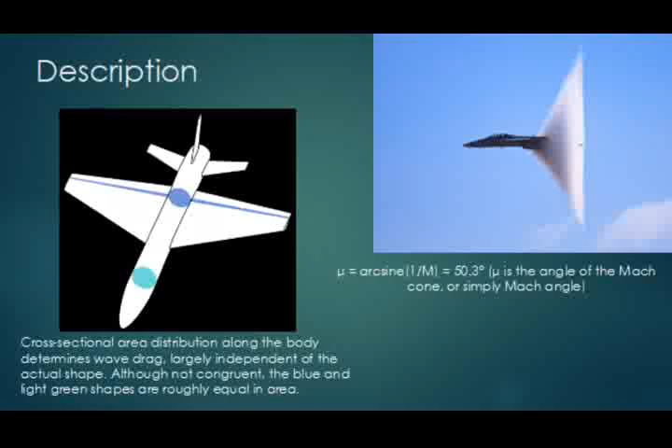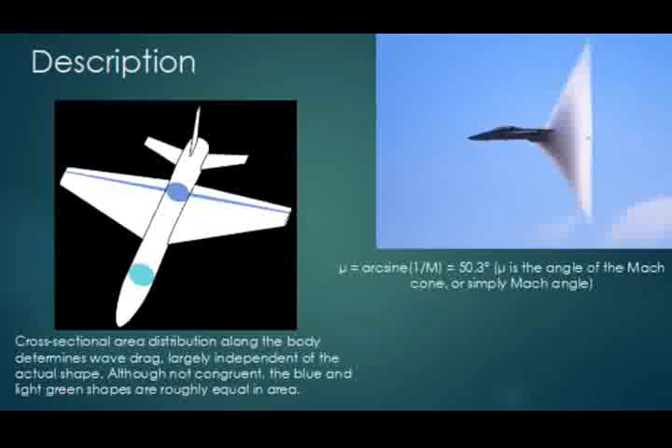To reduce the number and power of these shock waves, an aerodynamic shape should change in cross-sectional area as smoothly as possible. The area rule says that two airplanes with the same longitudinal cross-sectional area distribution have the same wave drag, independent of how the area is distributed laterally, for example in the fuselage or in the wing. Furthermore, to avoid the formation of strong shock waves, this total area distribution must be smooth.

As a result, the aircraft have to be carefully arranged so at the location of the wing the fuselage is narrowed or waisted so that the total area does not change much. Similarly, but less pronounced, fuselage waisting is used at the location of a bubble canopy and perhaps the tail surfaces.

The area rule also holds true at speeds exceeding the speed of sound, but in this case the body arrangement is in respect to the Mach line for the design speed. For example, consider that at Mach 1.3, the angle of the Mach cone formed off the body of the aircraft will be about mu equals arcsine times 1 divided by m, which is equal to 50.3 degrees. The mu being the angle of the Mach cone, or simply the Mach angle.

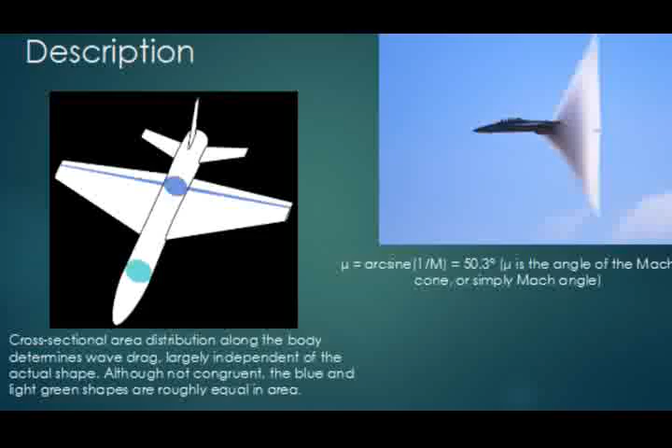In this case, the perfect shape is biased rearward or aft-facing. Therefore, aircraft designed for high-speed cruise usually have wings towards the rear. A classic example of such design is the Concorde.

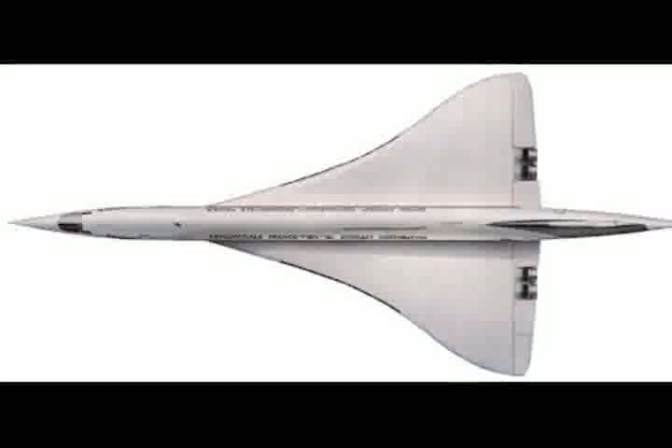When applying the transonic area rule, the condition that the plane defining the cross-section meets the longitudinal axis at the Mach angle mu no longer prescribes a unique plane for mu other than the 90 degrees given by the m equals 1 part of the equation given earlier. The correct procedure is to average over all possible orientations of the intersecting plane.

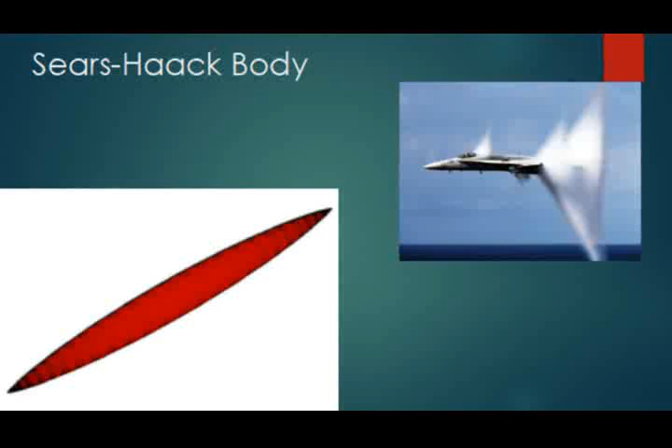Now to discuss a relevant topic, the Sears-Haack body, which is a superficially related concept, but it is the shape with the minimum wave drag for a given length and volume. However, the Sears-Haack body shape is derived starting with the Prandtl-Glauert equation, which governs small disturbance supersonic flows. But this equation is not valid for transonic flows where the area rule applies. So although the Sears-Haack body shape, being smooth, will have favorable wave drag properties according to the area rule, it is not theoretically optimum.

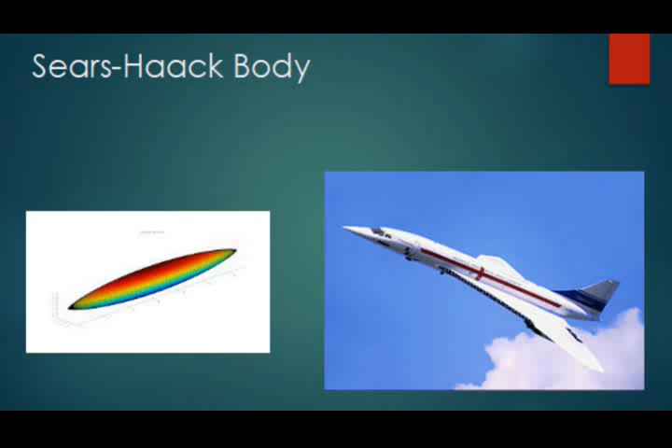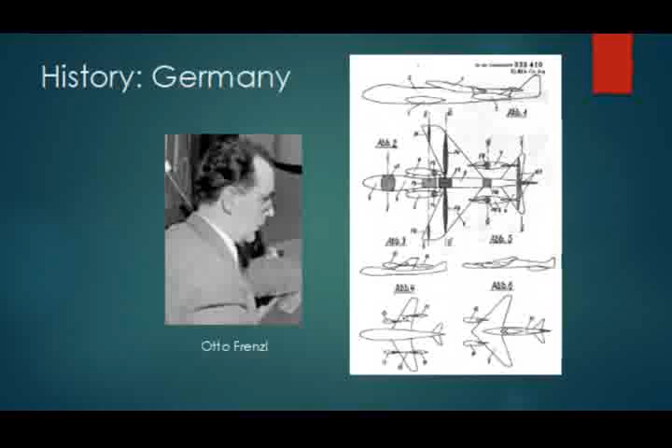A bit of history on the subject, starting with Germany. The area rule was discovered by Otto Frenzl when comparing a swept wing with a W wing with extreme high wave drag, while working on a transonic wind tunnel at Junkers Works in Germany between 1943 and 1945. He wrote a description on 17 December 1943 with the title Arrangement of Displacement Bodies in High-Speed Flight.

This was used in a patent filed in 1944. The results of this research were presented to a wide circle in March 1944 by Theodor Zobel at the German Academy of Aeronautics Research, in the lecture Fundamentally New Ways to Increase Performance of High-Speed Aircraft.

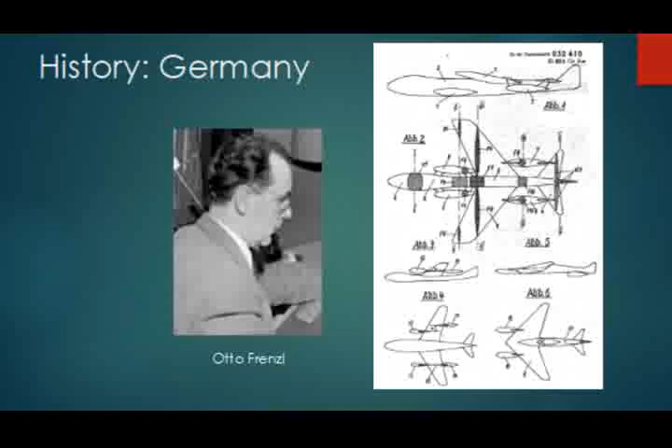Several other researchers came close to developing a similar theory, notably Dietrich Küchemann, who designed a tapered fighter that was dubbed the Küchemann Coke bottle when it was discovered by U.S. forces in 1946. In this case, Küchemann arrived at the solution by studying airflow, notably span-wise flow over a swept wing. The swept wing is already an indirect application of the area rule.

In the United States, Wallace D. Hayes, a pioneer of supersonic flight, developed a transonic area rule in publications beginning in 1947 with his PhD thesis at the California Institute of Technology.

Also, Richard T. Whitcomb, after whom the rule is named, independently discovered this rule in 1952 while working at the NACA, which is a precursor to today's NASA, using the new 8-foot high-speed tunnel, a wind tunnel with performance up to Mach 0.95 at NACA's Langley Research Center.

He was surprised by the increase in drag due to shockwave formation. Whitcomb realized that for analytical purposes, an airplane could be reduced to a streamlined body of revolution, elongated as much as possible to mitigate abrupt discontinuities, and hence equally abrupt drag rise.

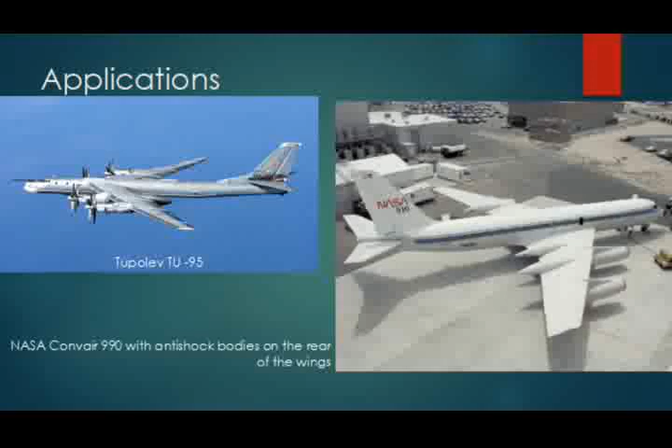Numerous designs of the era were likewise modified in this fashion, either by adding new fuel tanks or tail extensions to smooth out the profile. The Tupolev Tu-95 Bear, a Soviet-era bomber, has large bulged landing gear nacelles behind the 2 inner engines, increasing the aircraft's overall cross-section aft of the wing root. Its airliner version has been the fastest propeller-driven aircraft in the world since 1960.

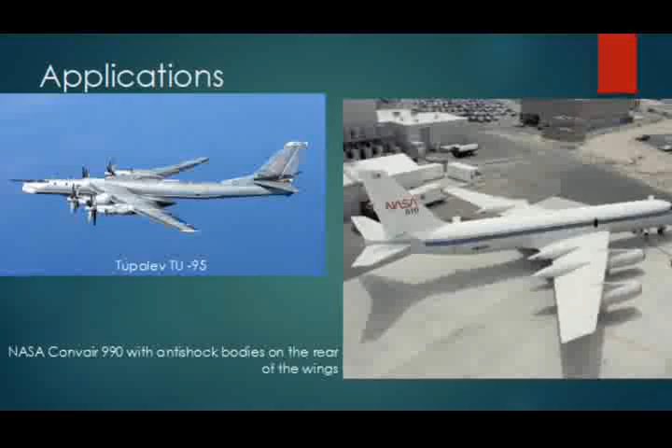The Convair 990 used a similar solution, adding bumps called anti-shock bodies to the trailing edge of the upper wing. The 990 remains the fastest U.S. airliner in history, cruising at up to Mach 0.89.

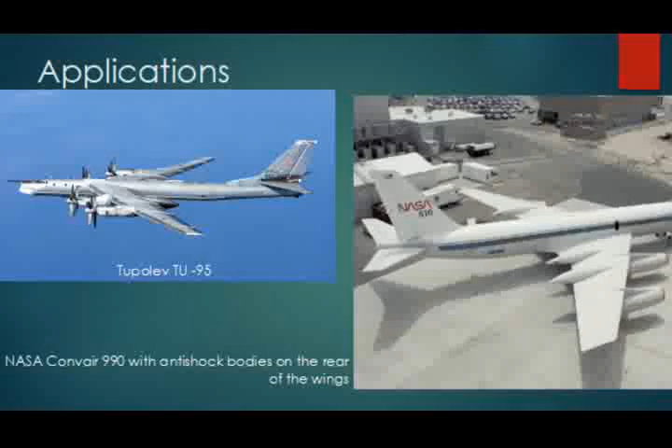Designers at Armstrong Whitworth took the concept a step further in the proposed M-wing, in which the wing was first swept forward and then to the rear. This allowed the fuselage to be narrowed on either side of the root instead of just behind it, leading to a smoother fuselage that remained wider on average than one using a classic swept wing.

One interesting outcome of the area rule is the shaping of the Boeing 747's upper deck. The aircraft was designed to carry standard intermodal containers in a two-wide, two-high stack on the main deck, which was considered a serious accident risk for the pilot if they were located in a cockpit at the front of the aircraft.

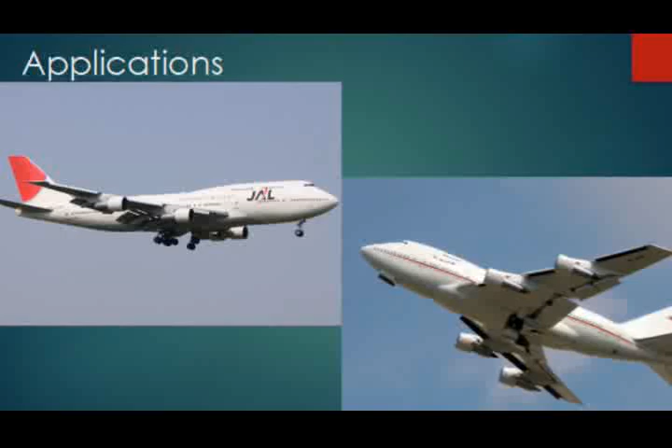They were instead moved to the deck above in a small hump, which was designed to be as small as possible given normal streamlining principles.

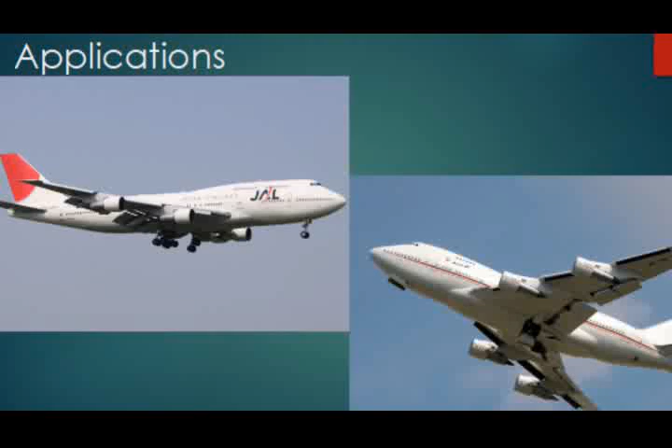It was later realized that the drag could be reduced much more by lengthening the hump, using it to reduce wave drag, offsetting the tail's surface contribution. The new design was introduced on the 747-300, improving its cruise speed and lowering drag, with the side effect of slightly increasing capacity on passenger flights.

Aircraft designed according to Whitcomb's area rule, such as the Blackburn Buccaneer and the Northrop F-5, looked odd at the time they were first tested and were dubbed the flying Coke bottles. But the area rule is effective and came to be an expected part of the appearance of any transonic aircraft.

Later designs started with the area rule in mind and came to look much more pleasing. Although the rule still applies, the visible fuselage waisting can only be seen on a few aircraft such as the B-1B Lancer, the Learjet 60, and the Tupolev Tu-160 Blackjack.

The same effect is now achieved by careful positioning of aircraft components, like the boosters and cargo bay on rockets, the jet engines in front of and not directly below the wings of the Airbus A380, the jet engines behind and not purely to the side of the fuselage of a Cessna Citation X, the shape and location of the canopy on the F-22 Raptor, and the image of the Airbus A380 showing obvious area rule shaping at the wing root, practically invisible from any other angle.

This has been a presentation on the area rule.